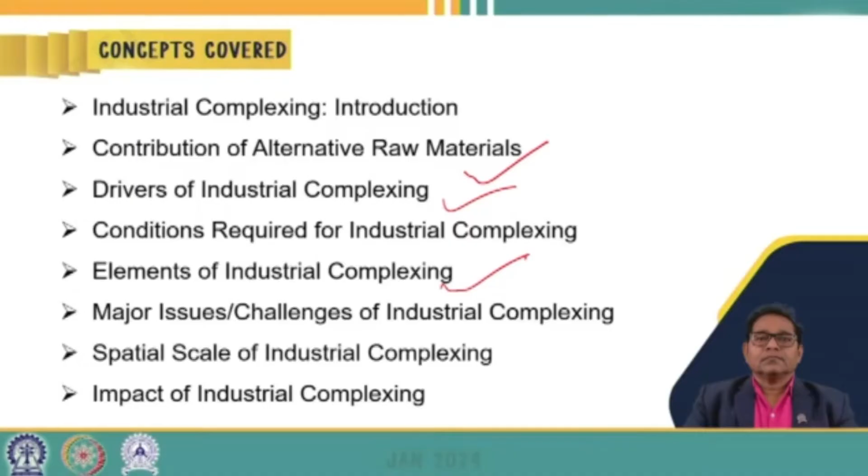Starting with the basic introduction to industrial complexing, this means basically industrial symbiosis between neighborhood industries. Industrial complexing is a process by virtue of which the waste or byproduct generated from one industry or process becomes the raw material for another industry before the cycle starts again. So industrial complexing means the process of attaining zero discharge by converting waste into byproducts and products.

The process basically involves three features: capture, recovery, and reuse of previously discarded resources from one industrial operation by another industry. This is capturing of the raw material. For this, we require information about neighborhood industries, their byproducts, waste, value, and composition, so that it can be stored and transported to another industrial complex for use as raw material.

For that industrial operation, another element is called recovery, meaning recovering valuable materials available in the waste which can be used as raw material for another industry, process, or operation. Finally, the byproducts generated from industries can be reused and recycled for sustainable use. This is the process of reutilizing discarded resources from one industry by another.

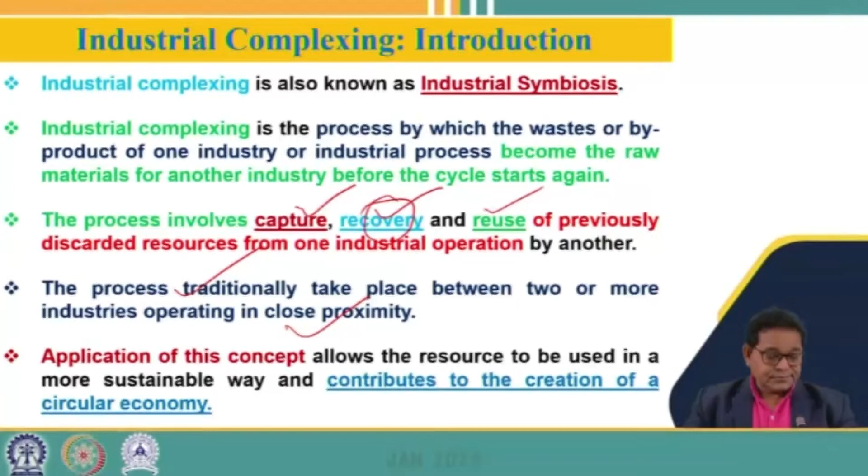Here is an example of the various systems used in industry, like the linear system and the circular system. For attaining sustainability in manufacturing and industrial operations, industrial complexing advances can lead to a circular economy. If we take a normal industry which adopts the linear process, natural resources are brought to the industry.

This is processed within the industry, and after processing, byproducts and products are generated. Along with these byproducts, waste is also generated. Products are normally sold in the market for utilization and use, but whatever waste is generated goes for disposal. This is a linear system where waste generated is discarded without further utilization, recovery, or reuse of the important ingredients present in the waste.

In the circular economy, the process is completely different, where raw materials coming from natural resources are transported to the industry, processed, and after processing the products are generated which are sold into the market for use.

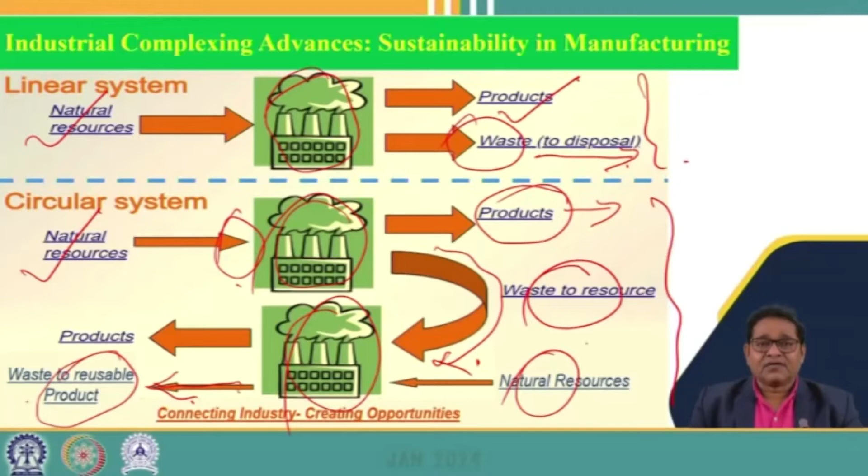So along with other raw materials coming from natural resources, they are mixed with this waste, and together it is processed within the same industrial operations. This waste, after processing, is converted into reusable products used further in society for various beneficial purposes. So there is a net zero waste generated in this circular process.

So that is basically adopting the concept of industrial complexing, which ultimately brings circular economy within the process and operation, and results into sustainable management of resources.

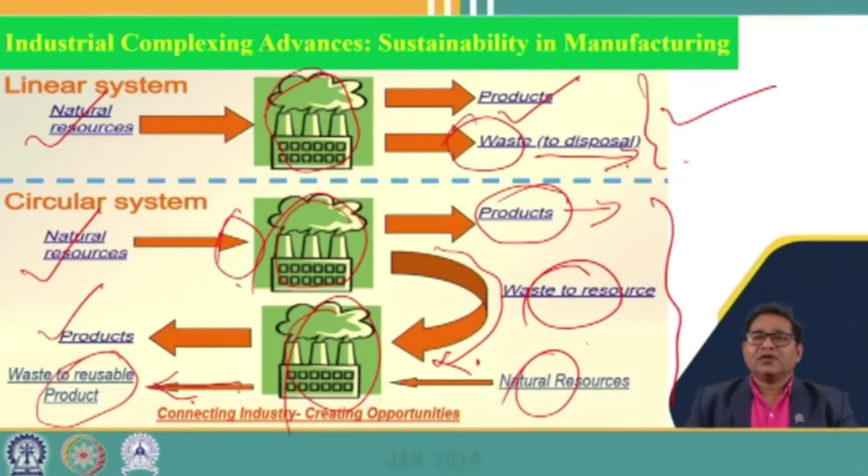So these are the basic differences between the linear system and circular systems used in industries. Previously industries were going for the linear system, but now because of advanced treatment technology, recovery and reuse technology, and waste utilization technology, we are adopting the circular economy system where waste generated is again used in nearby industry as a raw material to generate reusable products which can further be reused and reutilized.

So this is an example of industrial complexing in a cement plant. Here, the cement plant is the center point of the industrial complexing system, where materials and waste generated from other industrial operations are processed and used as raw material for sustainable management of waste and use of waste as a resource.

So here, the cement plant uses a lot of silica. This silica can be generated from construction and demolition industries, and also from ceramic, clay and sand production industries. So this silica, generated as waste from these industries, is diverted to the cement plant for use as a raw material.

And similarly, the iron and steel industry also generates a lot of mill scale, which is used as a source of iron required as raw material for the cement plant. So this mill scale is also used as a raw material.

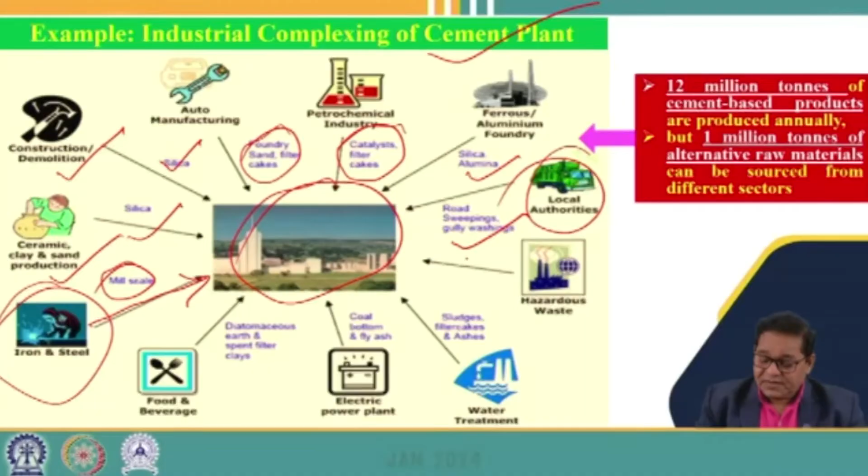And also from many other industries like foundry sand, filter cakes, catalytic filter cakes, silica alumina, road sweeping waste generated from local authorities, and even some hazardous waste, along with sludge from filter cakes and fly ash generated from thermal power plants. These are the coal combustion residues generated from different thermal power plants.

So these are all the alternative raw materials available from different sources, and they can be used as raw material for a cement plant for initiating the industrial complexing for attainment of zero waste.

So by this, what we get is a cement plant with a production capacity of 12 million tons of cement, which requires a lot of raw materials. Out of this, around 1 million ton of raw material required for the production of 12 million tons of cement can be generated by industrial complexing from different alternative raw materials available from ceramic industry, construction industries, iron and steel, and thermal power plants using coal combustion residues.

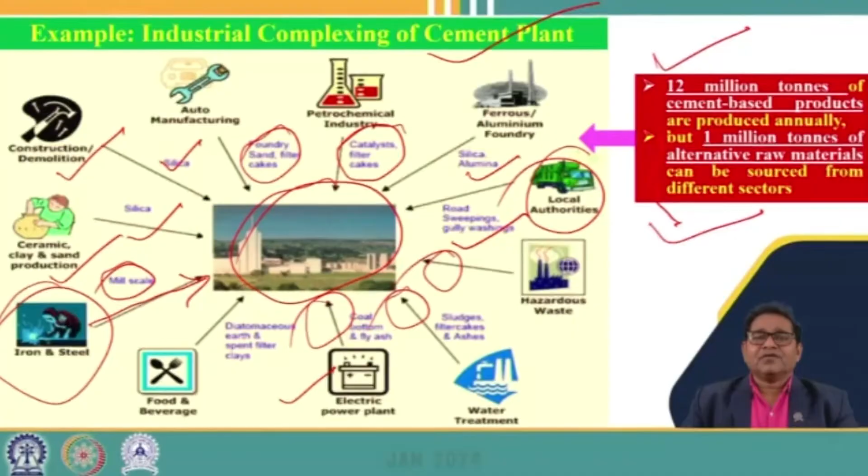So nowadays there are a number of cement plants using coal combustion residues, the fly ash generated from thermal power plants, as raw material to be used in a cement plant for production of cement. This ultimately benefits the industries in two ways: one, the waste generated is being utilized and converted into a resource, which basically attains zero discharge and aids the circular economy of the system.

So let us talk about what are the different drivers which are used in industrial complexing. That is basically the major driver, diversity in the industries. In industrial premises there must be variety of industries, and those industries must have industrial symbiosis where the waste generated from different industries' various operations can be utilized in another industry as a raw material for generation of reusable byproducts. And then geographic proximity, as I discussed, transportation is one of the important issues which incurs a lot of cost and makes the products more costly.

So for this industrial complexing, the industries which are located must be in close proximity to each other, so that industrial complexing would not result into transportation of raw material over a large distance, and that in turn will result in economy of the process while implementing the industrial complexing concept.

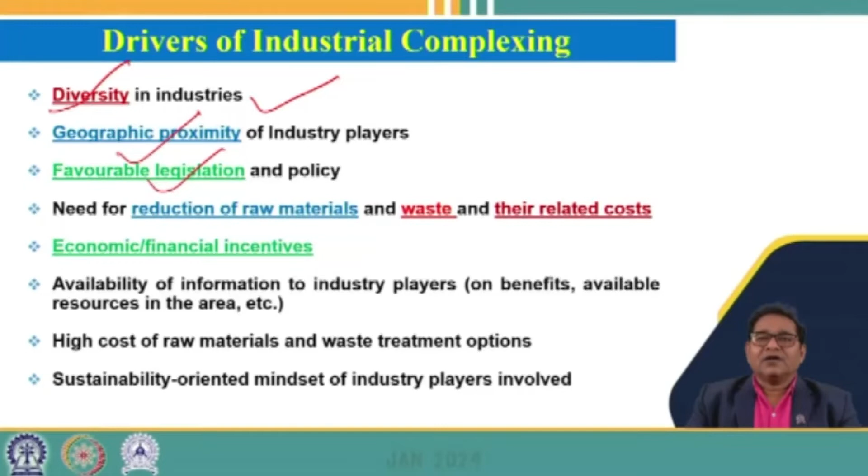And then there must be a favorable legislation and policy, that the country should have a favorable legislation and policy for reuse and reutilization of waste products from one industry to another. And then there is also a need for reduction of the raw material and waste and their related cost.

So as I discussed, if there is a scarcity of raw material, that basically arises the need for industrial complexing, so that the raw material consumption of that industry can be decreased. Similarly, the waste utilization concept should also be there to create the need for industrial complexing. And finally the cost, which ultimately depends upon the use of waste product into reusable products, which reduces cost and makes the process economical.

So economic and financial incentives must also be provided by the government through proper legislation and policy for waste utilization. If some benefits or incentives are given by the government, that will attract industries, especially smaller scale industries, to adopt the industrial complexing phenomena.

And there are other drivers as well, like availability of information about the industries and various industrial players which are active in the process of industrial complexing, and who can deliver information on the benefits of industrial complexing and what different resources are available in one industry which can be used by others for utilization.

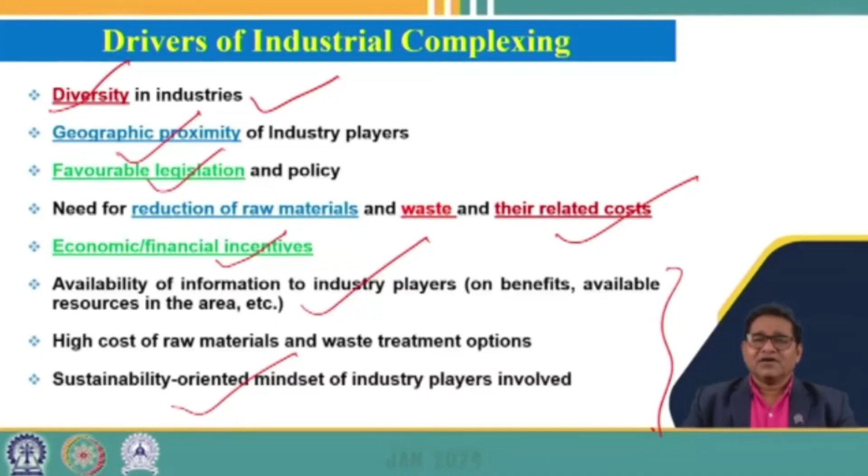And then the last point is sustainability oriented mindset. That is the ultimate requirement among the industrial players involved in the industrial complexing process. They should have this mindset for sustainable development, and such sustainability oriented industry players may lead to the development and implementation of industrial complexing process.

Then let us talk about the conditions needed for adopting this industrial complexing process. That is basically specific legislation. There must be legislation and policy made by the government which favors industrial symbiosis practices to adopt the economy, and a matching system - a meeting place where the industry players and potential users can meet for discussion, so as to decide on agreements for adopting measures for the industrial complexing process.

And then the scarcity of natural resources as raw material. If raw materials are limited within the proximity of the industries, that will arise the need for alternative raw materials, which can attract industry players to use waste materials or alternative raw materials available nearby for their production process.

And then price of the raw materials. As I said, price is an important element which decides the adoption of industrial complexing process. Because of increase in the price of the raw material, that favors the use of alternative raw materials which are available in the form of waste or nearby industries' byproducts, to adopt overall economy into the process.

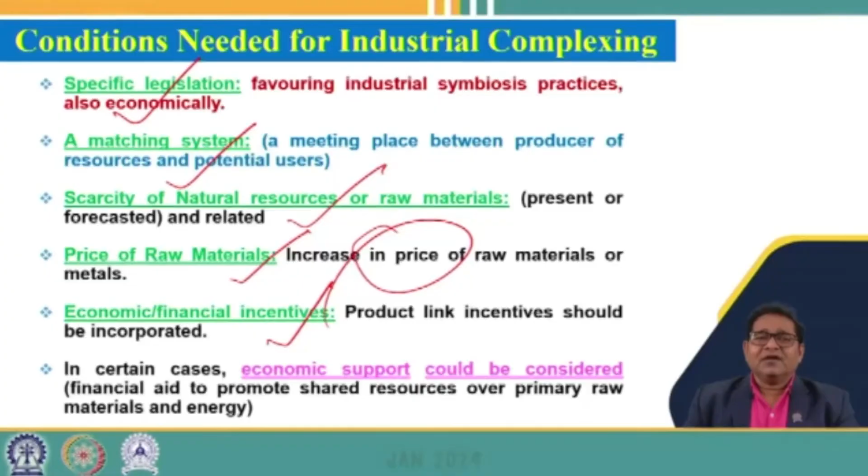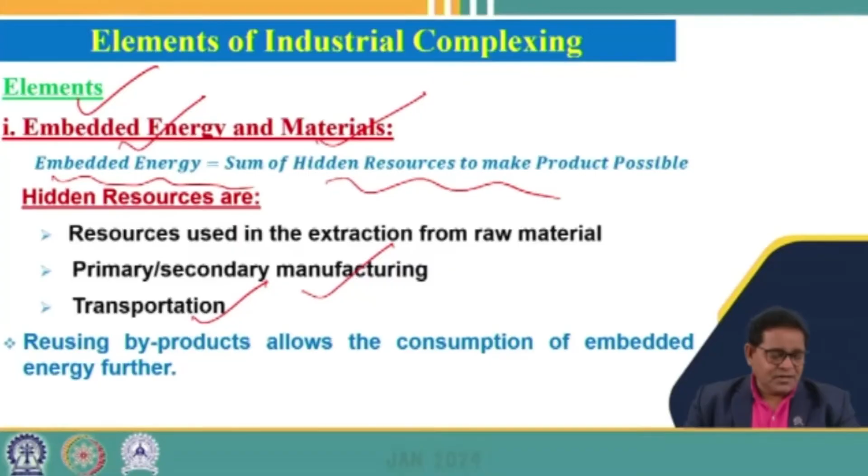So let us discuss the various elements of industrial complexing. First, an important element is the embedded energy and materials. Embedded energy is the sum of hidden resources that make the product possible - the resource used in extraction from the raw material, primary or secondary manufacturing process, which also involves transportation. Reusing the byproduct allows consumption of this embedded energy further. This is an important element required for the industrial complexing process.

The second element of industrial complexing is the life cycle perspective, meaning tracking of the raw material from its cradle to grave - tracking the transformation of the resource from when it is mined out until it is disposed or reutilized in different unit operations and converted into the product. Even after the product is made and utilized, we track how it is discarded, recycled or disposed into the system. This overall life cycle analysis of the raw material or resource is a very important element in accomplishing the industrial complexing phenomena, because it allows consideration of the entire set of environmental impact at each stage of manufacturing.

For example, if we see the natural resources, here is the life cycle of product A, here is the life cycle of product B, and here is the life cycle analysis of product C. What we can see is that product A can be used by one industry or passed to another industry for the production of another product. This is the interrelation of products to each other in a closed life cycle perspective, in such a way that a closed loop manufacturing system is established, resulting in the circular economy of the process and minimum waste.

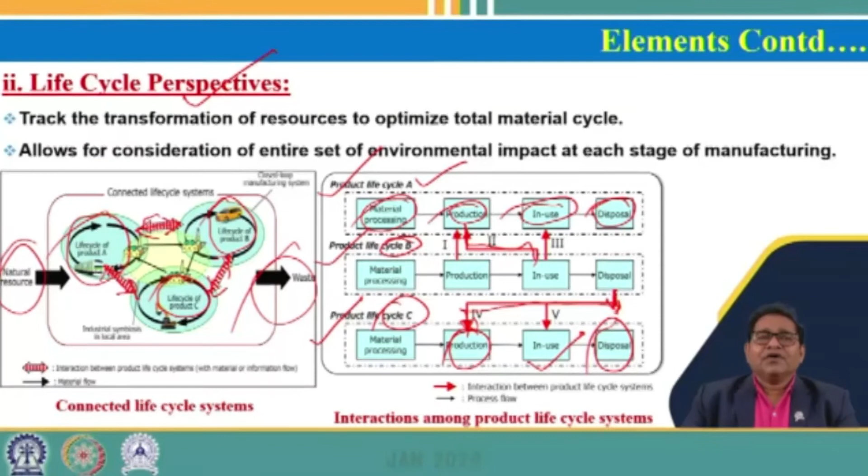And then that is the third element, that is the cascading impact. That is the resource basically which is to be used repeatedly into different applications. So changes in the grade of the course, and cascade basically ends up when the resource is discarded or requires a lot of energy to reuse, recycle, and to recover its value.

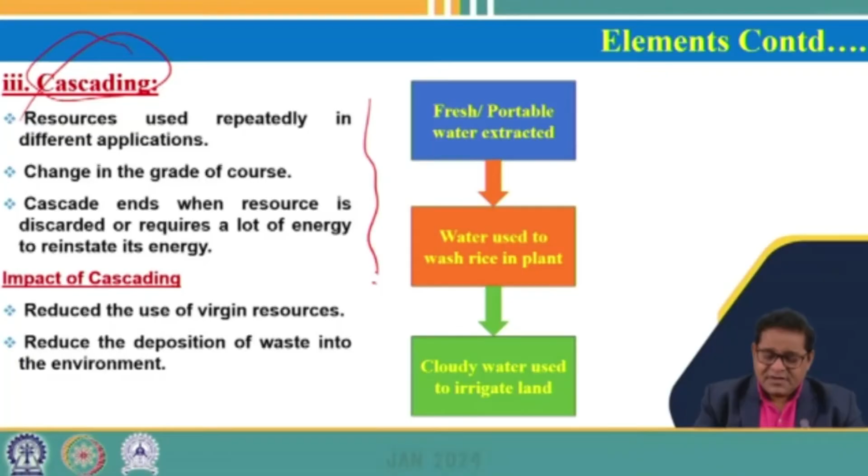So that basically cascading effects, that is like if we see that is the fresh or potable water that is extracted, which is used to wash out the rice in the plants. After washing, whatever the wastewater that is used, basically that contains a lot of suspended impurities, and that cloudy water again that can be used for irrigation of the crop in the agricultural applications.

So that basically one fresh water that has been used in one operation, and then again it is used in the irrigation purpose. So that is like the cascading effect of using one resource repeatedly many times from one industrial operation to another industrial operation, and this has to be carried out till the waste requires a lot of energy to reinstate its value or reutilization of the waste into valuable products.

So then finally that is discarded into the environment, because then it becomes very costlier for recycling and reuse of the waste. So finally that has to be disposed of.

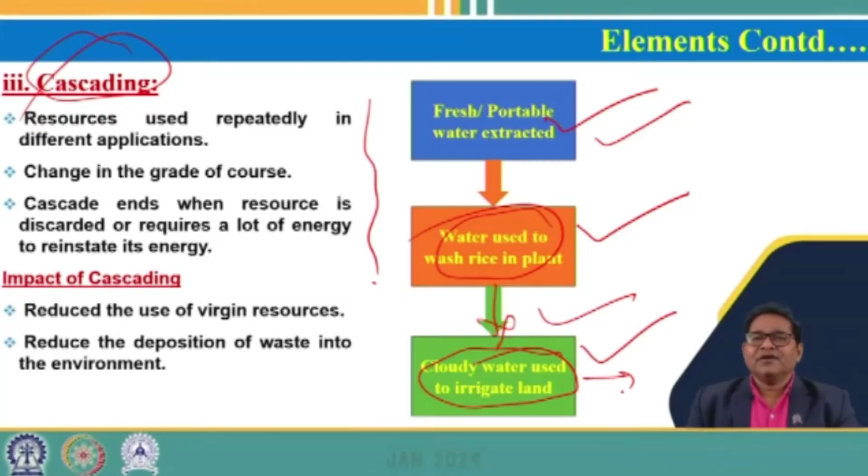And this is loop closing and its impact. So that is basically the return of material to a form similar to its previous ones. The material has to be used in one industry to another industry, from one process to another process, and then finally it has to be returned to its previous form so as to adopt a closed loop cycle. And the impact of this closed loop cycle reduces the use of the fresh raw materials or the resource, which ultimately reduces the deposition of waste into the environment.

So here if we see the waste produced from manufacturing process, and this is the fresh raw material, and the waste produced from another industry, that together has to be used, and that generates different products. And then using distribution, logistics, sales and retails, and consumption and utilization of these products, and again converting the waste into reusable form of resource. So that basically constitutes a closing loop cycle, which is very, very essential for sustainable resource management.

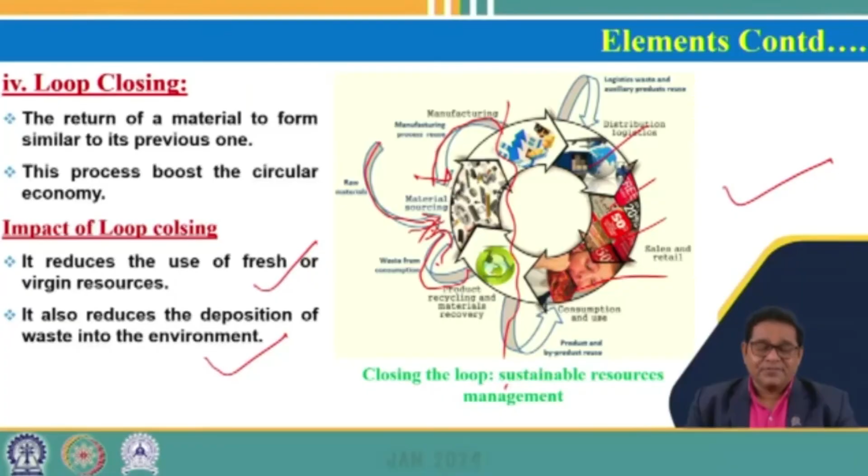So then let us talk about the various issues of industrial complexing. So that is the first one, that is the tracking of material, means auditing the types and how much amount of material, water, energy that flows into the system or into the industrial operations.

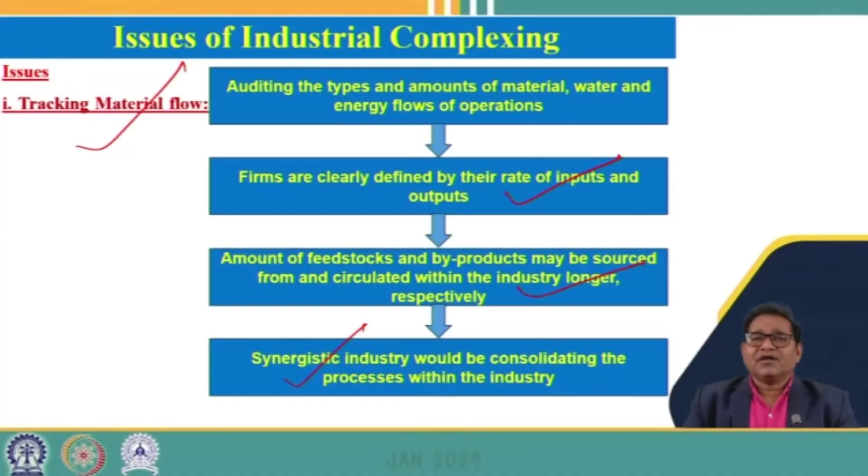And then we see the firms which are clearly defined by their rate of inputs and outputs. And finally we see that is the amount of feedstocks and the byproducts that may be sourced from and circulated within the industries or the operations which exist within the closed loop cycles. And finally the synergistic industry that would be consolidating the process within the industry so as to adopt the closed loop cycles for reutilization and reuse of these materials.

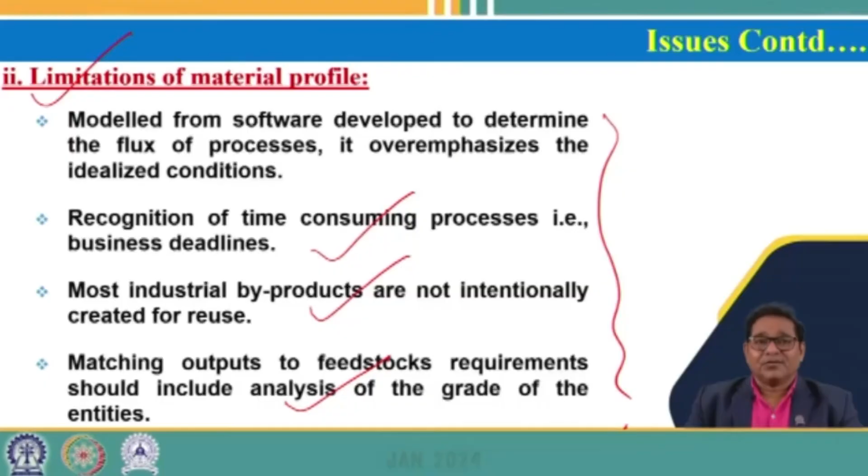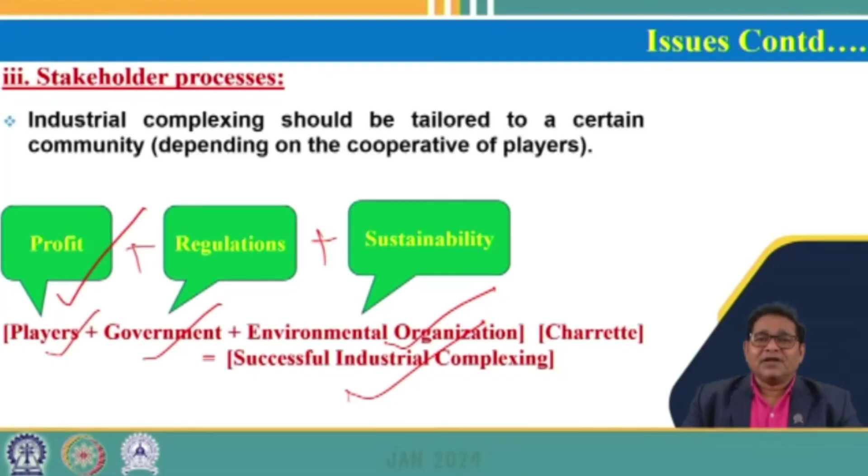So these are the different stakeholders which are required, like industry players, government, and environmental regulatory agencies. So their roles are very important for attaining successful industrial complexing. So these are the references, and thank you.